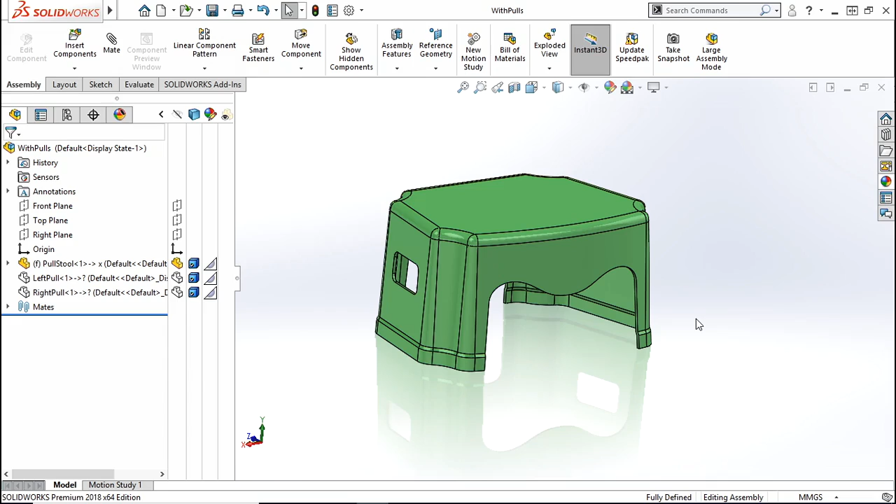I know I've warned you away from undercuts and explained why they won't work in a standard bivalve mold, but what if your design absolutely requires it? Many parts require additional moving pieces as parts of the mold, which adds cost for every additional pull. They go by a few names: side actions, cams, and side pulls.

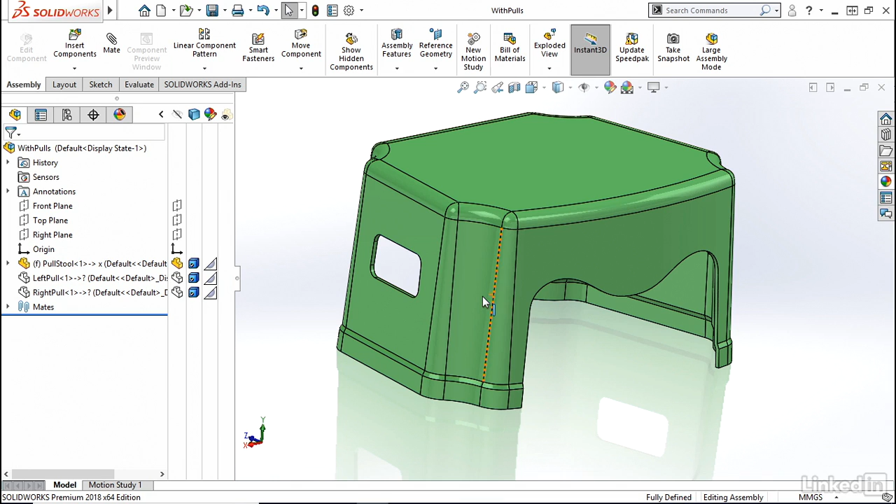I like to call them pulls because there are pieces of the mold that hold in place during injection and pull away so you can eject the entire part. They pull perpendicular to the face they're pulling away from, but they also need their own draft in relation to that face. The pull is like a tiny simplified mold for specific features on your part. It needs draft in relation to the direction it's being pulled.

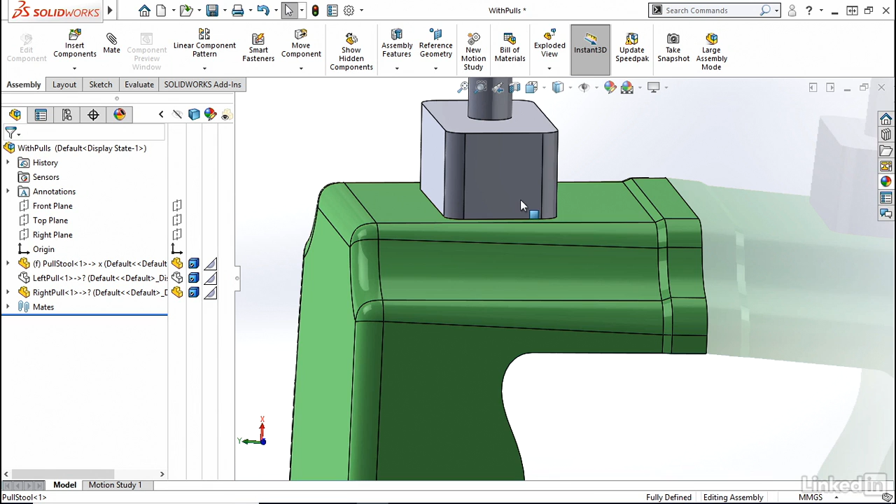Usually, pulls leave a mark, so if that bothers you, try to incorporate the shape of your pull into your design. The part end of the pull should match the curvature of your part, even on a part with drafted walls like this. Pulls enable you to have undercuts. Be mindful of designing a part that just has a bunch of pulls, because every added layer of complexity to your mold costs you the big bucks.

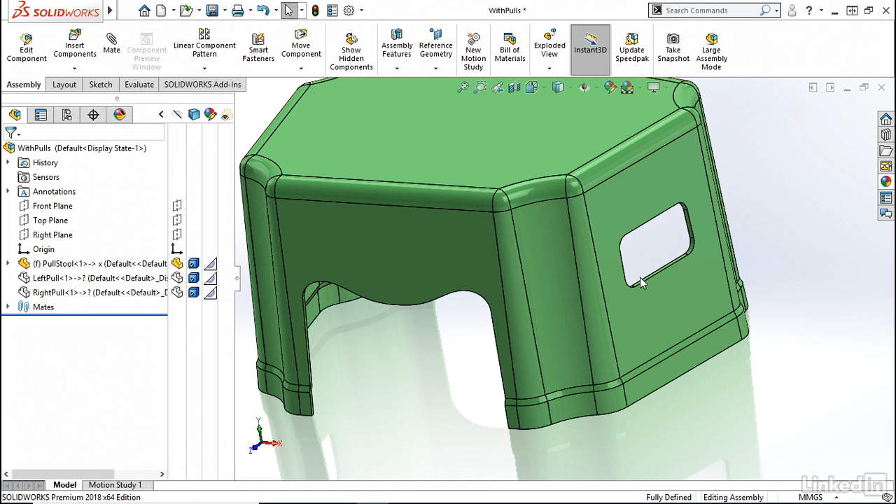In addition, each pull is another piece of the puzzle that can fail, wear, or not meet your standard tolerance. The main purpose of pulls in general is to enable more complex geometry by holding in place during a cycle and pulling away so the part can be removed. Let's look at a draft visualization of this clip for the sake of argument.

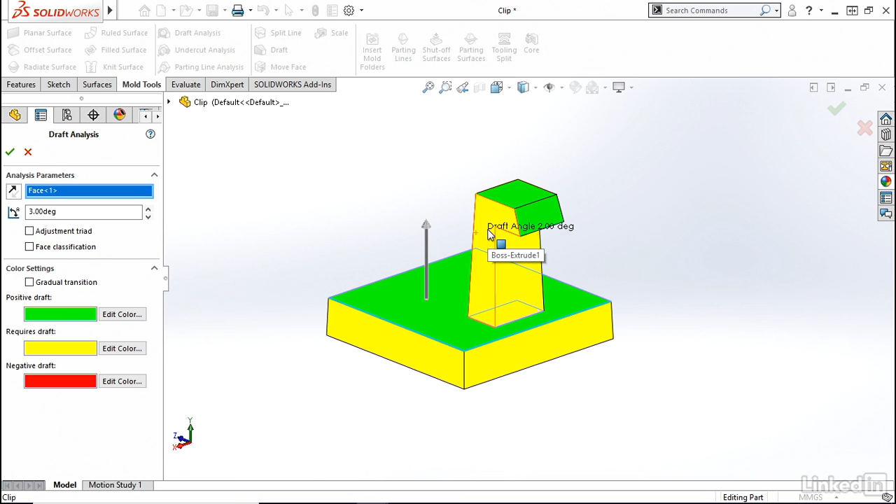Parts that have clips require something a little extra. Think about it. The two parts of the die pull apart along the up and down axis, as shown. How can we get this clip in here? You'll need a pull. Let's see what that pull looks like.

Cool, right? For a catch like this, you can add a pull, which would be this block, in a number of ways. If you can get away with it, you can make a hole right below the clip, and so the pull would be part of a main mold half. Let's say you can't put a hole right here though. Time for a handy cam.

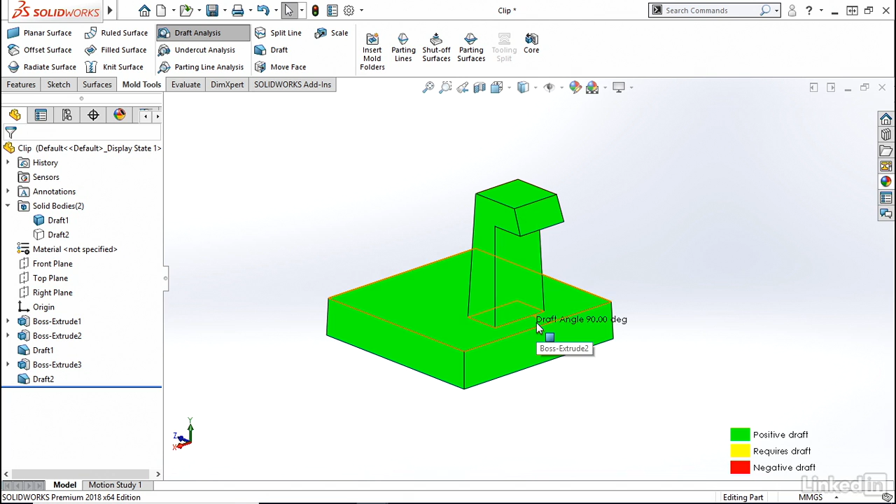From the side, this pull makes this feature follow the rules of draft for part removal. So when the part is done, the robot moves it out of the way, easy peasy. While you're working out the details in the prototyping stage, you could also use something called a pick-out.

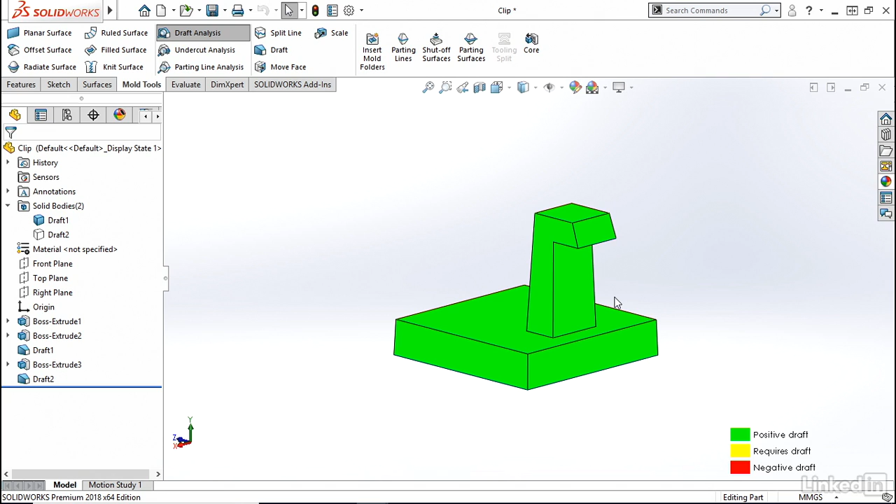Before casting, these individual pieces are placed in the mold, and when your cast is complete, you pick it out. Because this adds time to every single cycle, it's not the quickest solution to your undercut problem, but can be helpful prior to having the final mold made.